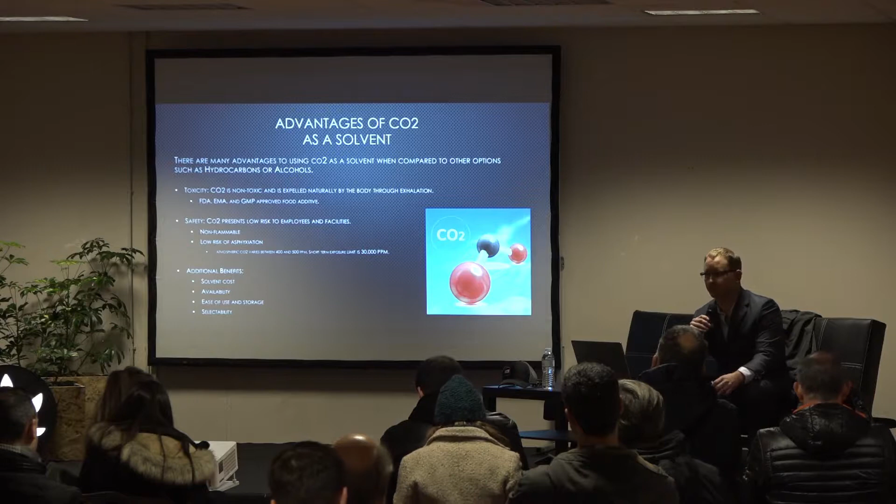Ease of storage. You don't have to deal with issues related to fire departments or municipality concerns, because it's a high pressure storage system that has very little chance for leakage. You have 50, 100, 200 pound tanks that don't leak, and you can stack many of them next to each other. They don't degrade over time, they can sit there. With our machines, we can recover anywhere from 80 to 95% of the CO2 used in the process. It depends on your application and what you're using the machine for.

So some differences as it relates to the versatility, which was the last item on that previous page, was its selectability and versatility. So with CO2, it has an advantage because you can have multiple states of matter with it. You can be running supercritical CO2, you can be running high pressure liquid CO2, you can be running a gas if you're trying to dry something.

Liquid CO2, which is also known as subcritical CO2, a lot of people get that mixed up, is beneficial for certain applications where you want to have very low wax carry through. It generally occurs below 31.1 C, so it's a cold process. You're not going to pull through chlorophyll, you're not going to pull through heavy waxes. There's a chance for some to come through, but not much.

And you have to be above about 5.1 bar, so somewhere between about 5.5 bar and really up to 5,000 psi. Provided you're below 30 C, you can be a liquid and be very high density and have a very good extraction from that.

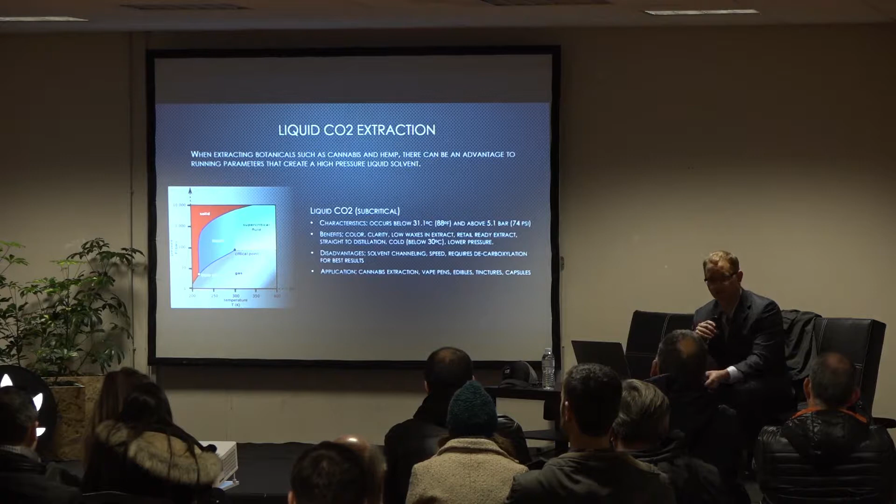The critical point of CO2, which is where it transitions from a liquid or gas to a supercritical fluid, is almost right at 31.1 C. We don't recommend anybody runs close to that, because when you're really close to the critical point, you can change a half a bar and flash from a supercritical fluid to a very low density gas and back and forth, and it causes real problems with the quality of your extract. So we recommend people stay away from that phase change point.

So if you're running a liquid CO2, we recommend staying below 30 C and keeping the pressure somewhere below about 1,300 psi. The benefits of liquid CO2 is the color and clarity that you'll get out of the extract. It'll be very clean and transparent with low waxes in it, provided it was done correctly.

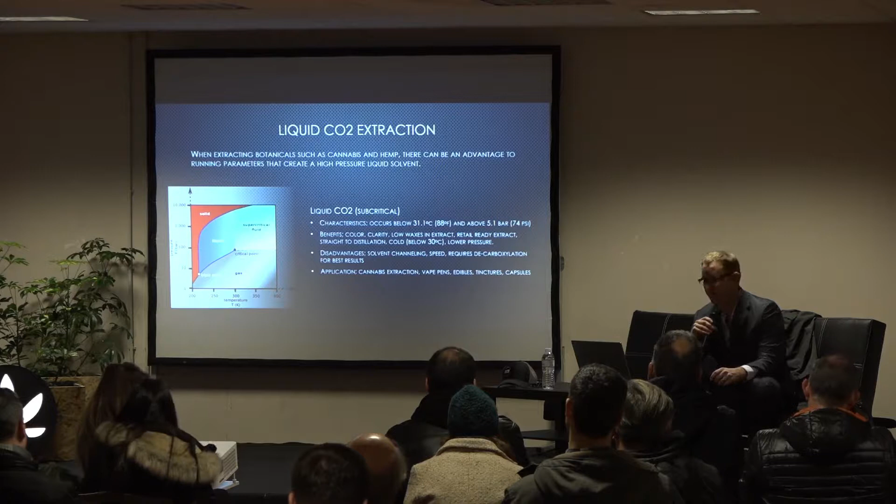You can create retail-ready extract using this method and our machines as well. So that's a benefit to people who are trying to make vaporizer pens or edibles or tinctures or capsules or something, who don't want to have all the extra equipment to go through winterization or distillation. You can make shelf-ready product right out of our machines running subcritical parameters.

Some disadvantages to running liquid CO2 is you can run into solvent channeling, which is where the solvent will take the path of least resistance. So your efficiency can tend to decline when you're running liquid CO2 because it'll move around denser pockets of material. To get around this, some of our clients will actually do a half extraction, pull the material out, mix it up, put it back in, and do a second extraction just to make sure they get the most efficient extraction possible while running subcritical. That's only a couple of people, but it is a possibility.

Another disadvantage is the speed. Although you have very high density, your volatility is really low because of your low temperature. So the speed is a little bit slower with subcritical, but you can make shelf-ready product right out of the machine, so it's a trade-off of what you're trying to produce and speed.

It does generally require decarboxylation of the plant material, and that is essentially heating the material to an adequate point for an adequate amount of time. We usually recommend about, forgive me, Fahrenheit, 250 degrees Fahrenheit for an hour to an hour and a half in an oven. A convection oven is ideal so that you get very good circulation of the air. There are some forced air ovens, convection ovens that are actually produced specifically for this that we can sell along with our machines in the event that you're interested in that.

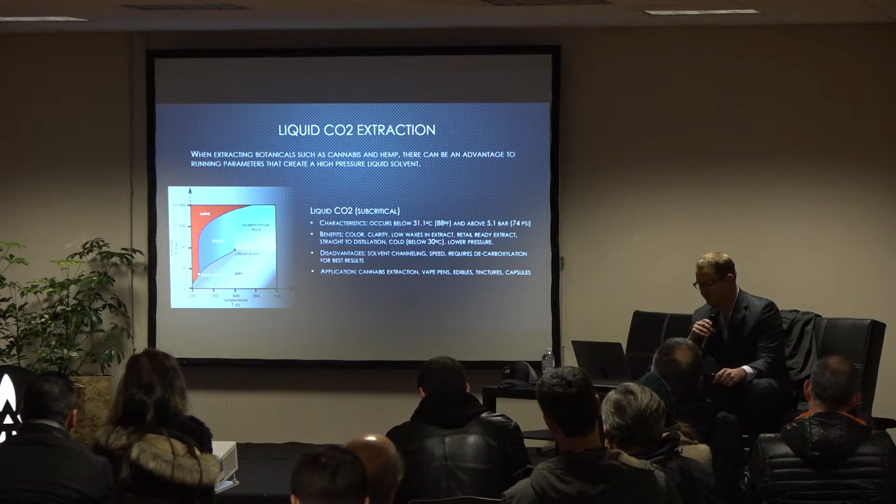Yeah, that's kind of it on liquid CO2. The next one that you'd really be using for extraction, vapor is not really beneficial for extraction, but you can do certain things with it.

The other phase that is ideal for CO2 is supercritical fluid extraction and supercritical CO2. Due to your higher process temperatures, in order to be supercritical CO2, you have to be hotter than 31.1 degrees Celsius. We recommend not going below 33 because, again, you get right next to that phase change point and have issues with maintaining parameters, and it gets funky in that area.

So above 33 degrees Celsius and above 75 bar, the actual point is 74 bar, but again, you want to stay a little ways away from that. So as long as you're at about 1100 psi and about 33 degrees Celsius, you will be a supercritical fluid.

However, at that parameter, your density is going to be so low that you're probably not going to have a very good extraction. If you wanted to run it for a day, maybe you would get some good oil out of it, but I don't think anybody wants to do that. So with supercritical extraction, that's kind of the starting point.

From there, you want to be able to target the compounds or groups of compounds by increasing the temperature and increasing the pressure. By increasing the temperature, you increase the volatility of the specific compound you're trying to extract, but at the same time, you're decreasing the density. So in order to maintain the density required to transfer the compounds into the collection chamber and through the solvent, you have to then increase the pressure to match the temperature.

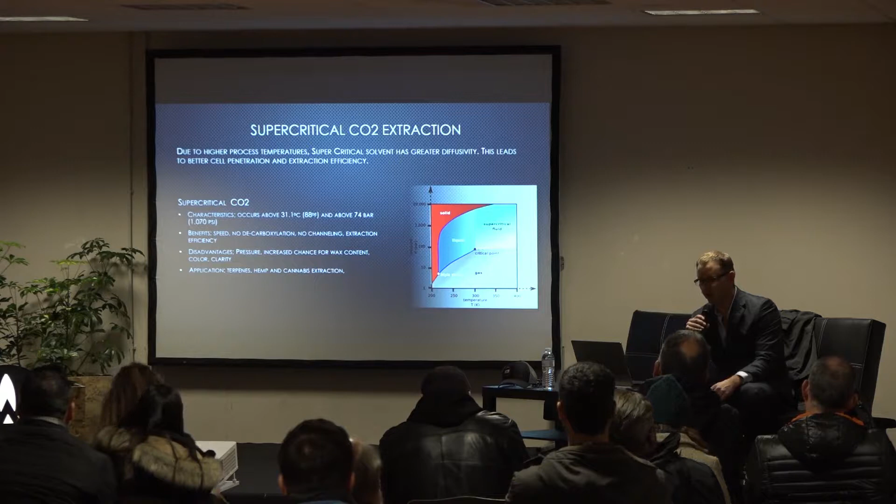Not necessarily no channeling, but very low risk of channeling, because supercritical fluid takes on properties of both a gas and a liquid. It expands to the entire extraction chamber, yet has the density of a liquid, and it also has very low surface tension, so it's able to transfer through cells and extract the compounds much easier.

Disadvantages to supercritical CO2 is the higher pressure that you have to go to, which makes the equipment a little bit more expensive. You have a slightly increased chance for wax content depending on the parameters that you're running. If you're running really hot and at a high pressure, you're probably going to be pulling waxes through, which will require post-processing such as winterization and distillation.

The other disadvantage is at those higher temperatures and pressures, your color and clarity of the extract will decrease as you increase the chlorophyll as well as wax content within your crude extract.

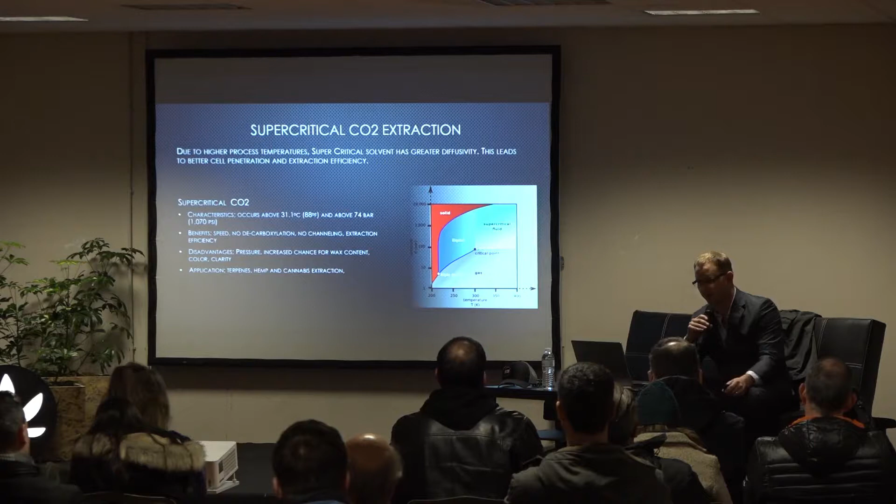Some applications of supercritical CO2 is terpenes. We're able to produce, and our clients are able to produce, very, very clean and product-ready terpenes right out of the machine using supercritical parameters at a high temperature but low density. I'll get into that a little bit later, but that is a very good application for supercritical CO2 and hemp and cannabis extraction.

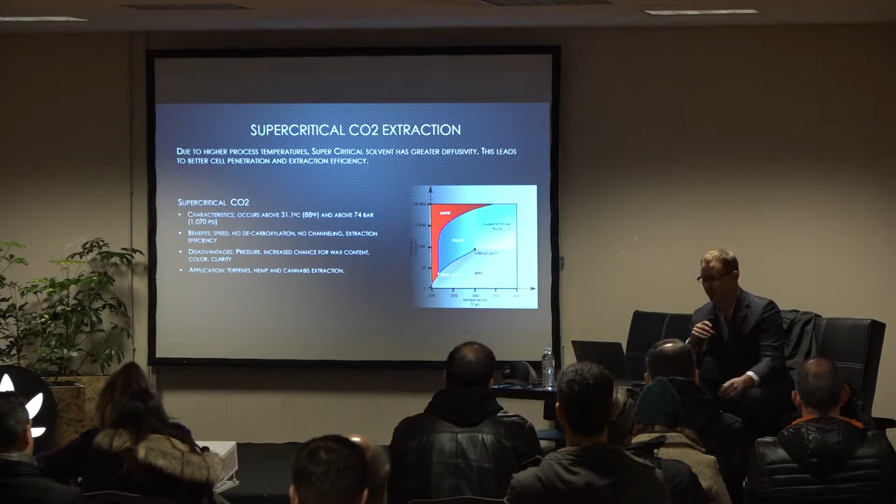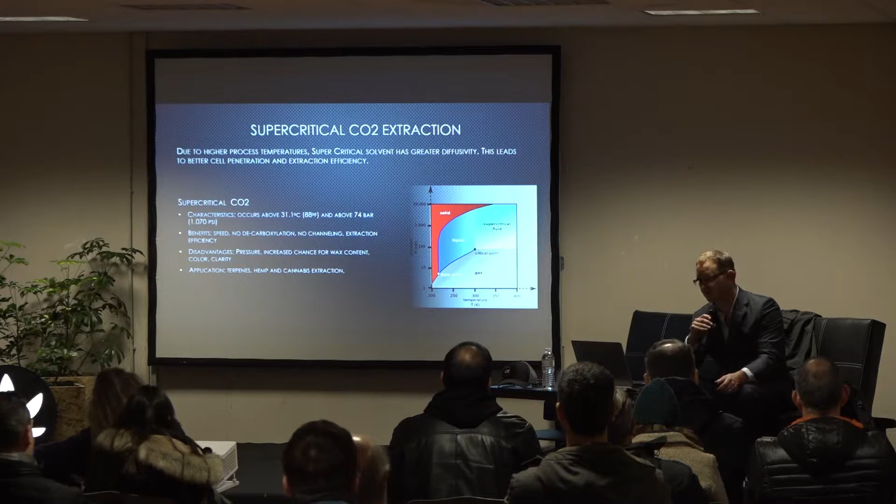Subcritical is not always ideal for hemp because in general it's grown outdoors and you have higher wax content when it's grown outdoors. You also have lower cannabinoid content when compared to cannabis, so it kind of makes more sense to just run a supercritical run when you're processing hemp. But you can really use it for whatever and play with it, do some research, do some development, and fine-tune your products with this type of process.

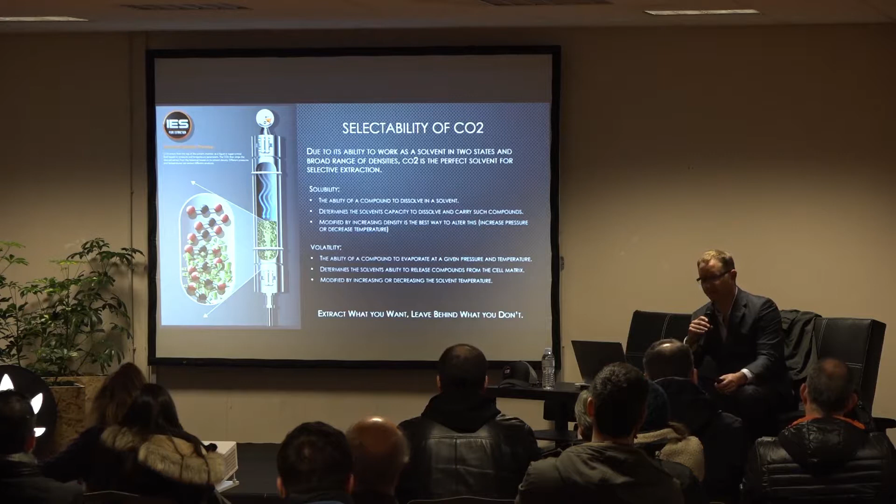So I spoke a little bit about the selectability of CO2 and that you can target groups of compounds. Cannabinoids tend to co-extract, so it's tough to separate CBD from THC during the extraction process because they're so similar to each other that they kind of come hand in hand. You can start to partition it to give a better product that's easier to post-process, but it's very difficult to get a pure cannabinoid product during the extraction process. It's much easier to take the crude extract and push it through some other equipment to get what you're looking for.

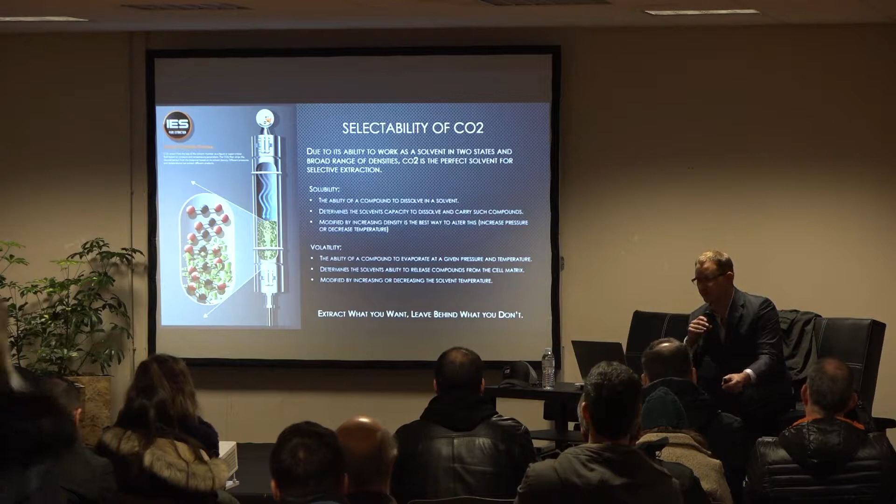Solubility is important. Solubility is basically the ability of a compound to be dissolved in a solvent. And that is obviously important because that is a direct indicator of how quick your extraction is going to be. It determines the solvent's capacity to dissolve and carry the compounds, and that will also determine the runtime you need to do. CO2 has a specific capacity at a given pressure, temperature, and a given compound, and if you have more of those compounds in a plant material, you will need to do a longer run on it to extract all of those compounds from it.

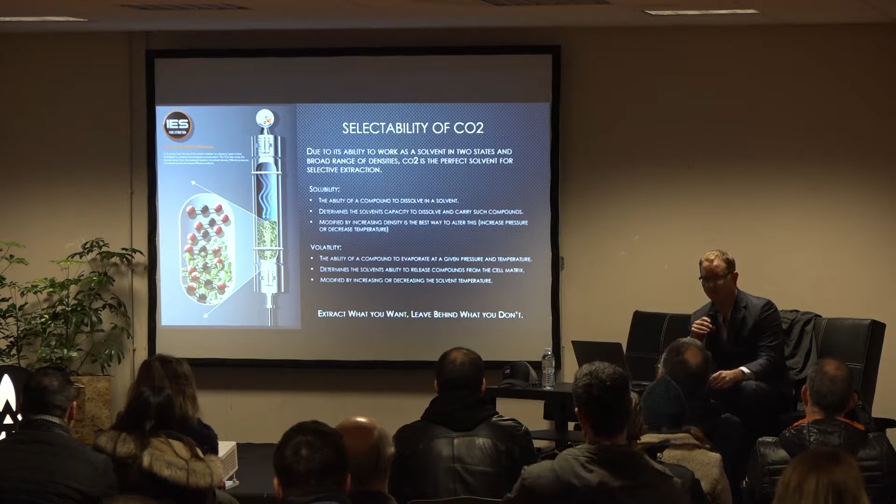The solubility can be modified by increasing the density, and the best way to do that is to increase the pressure and decrease the temperature. But as you decrease the temperature, you're decreasing the volatility and therefore decreasing the ability for the solvent to actually extract it. So the volatility is very important as well.

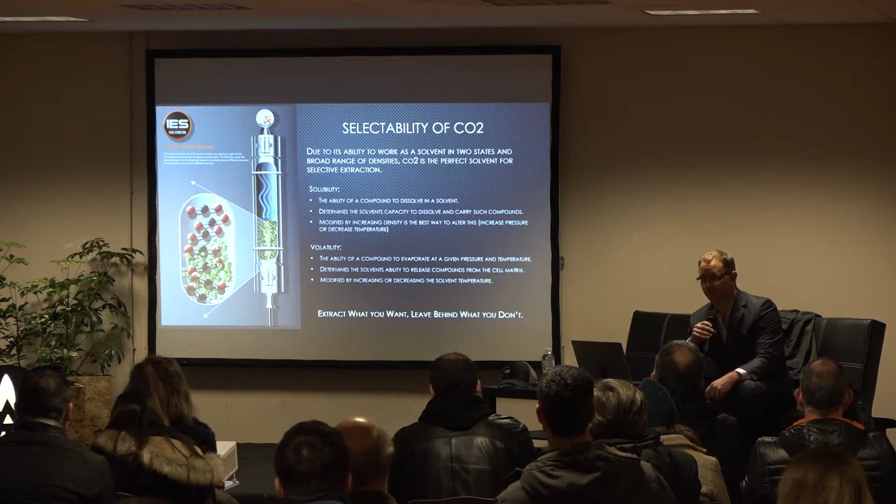And the volatility - when I say volatility, I don't mean it as explosiveness. It's not going to explode because it's volatile. Volatility is basically the best way to describe it - a measure of a compound's ability to evaporate at atmospheric pressures and temperatures. So water is essentially not volatile at all, it will sit there in a cup for quite a long time until it evaporates. CO2 is incredibly volatile because it will never be liquid in a cup. It'll likely flash straight to dry ice before that would ever happen, and from there it will sublimate into gas. It's really good for post-processing because you don't have to take steps to remove the solvent. It does it itself, it just evaporates right out of it.

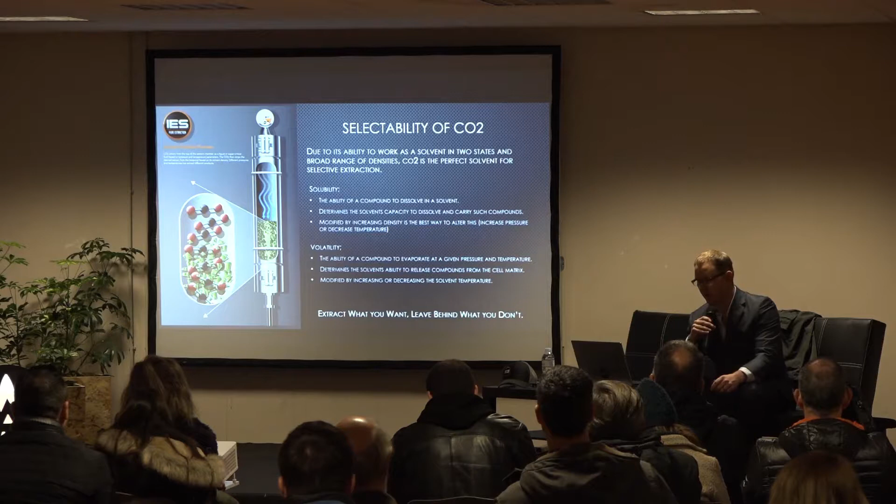Sorry, let me make sure I got everything on this page here. Yeah, and...

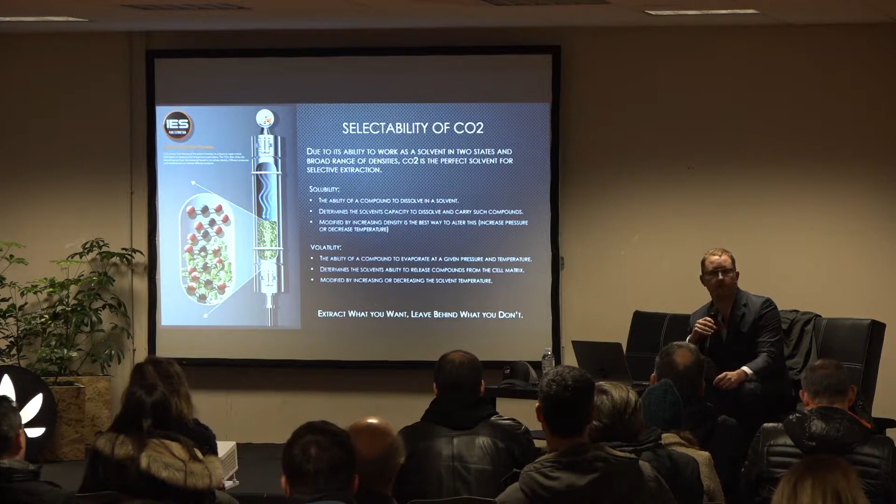The selectivity and selectability of CO2 with solubility and volatility is the basis for our slogan of extract what you want, leave behind what you don't. When run correctly, you can get non-winterized oil that exceeds the quality of winterized oil from butane or ethanol out of CO2. It's not going to be the first time you turn on the machine, but within a few weeks you can become an expert at running these machines and make amazing product without the use of extra equipment.

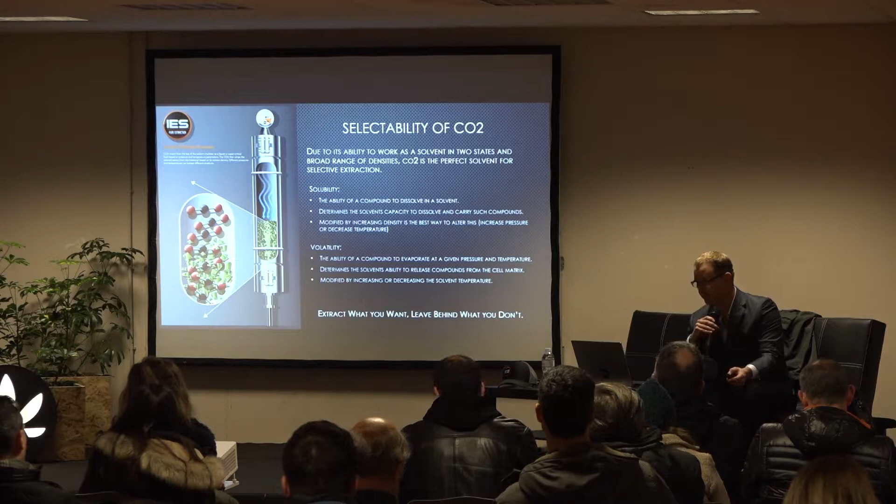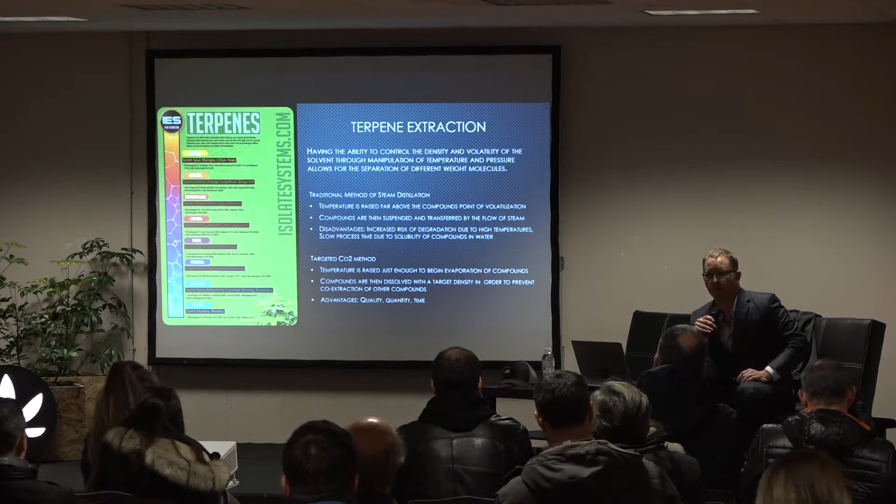So I spoke earlier about terpenes. Terpenes are very important for the entourage effect and whole plant phenomena, and I'm a big advocate for that. I think that isolated CBD is missing many links to help people. I think it's an easy way to get to market because you can sell across international lines and state lines within the United States, but it's missing many of the beneficial compounds that really make cannabis and hemp so medically beneficial.

So the traditional method for terpene extraction, which would be essential oils - it's the essence of it, it's the flavor, it's what you smell when you open a bag or when you smell a fresh plant. Those are the terpenes. The traditional method of steam distillation is you raise the temperature of the compound past the point of volatility, essentially boiling the compound using water, and then the water is actually suspending and transferring the compounds into a condensing column where you can then recapture the water, and terpenes are usually on top, and do a separation that way.

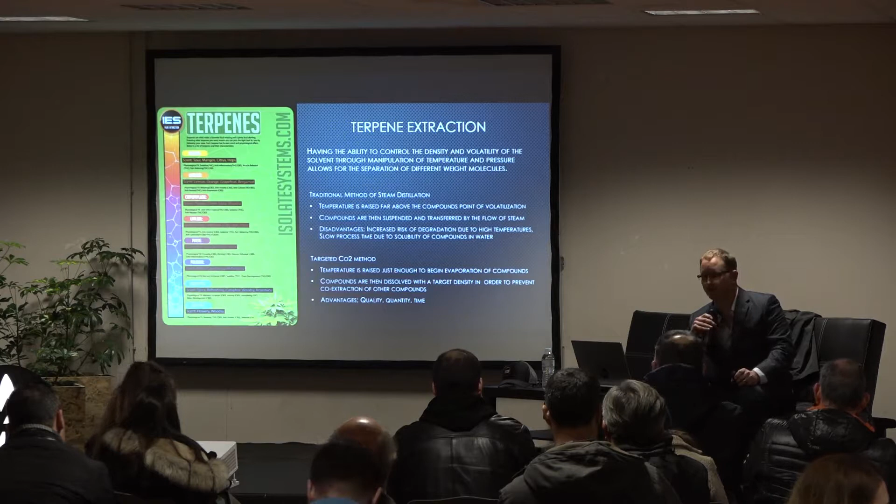The problem with steam distillation is it's inefficient. It leaves your plant material soaking wet, which then has to be dried or processed in some way to get the cannabinoids out. And it's a high temperature when you're talking about volatile, delicate compounds. The benefit to targeted CO2 extraction is the temperature is raised just enough to begin the evaporation of the compounds.

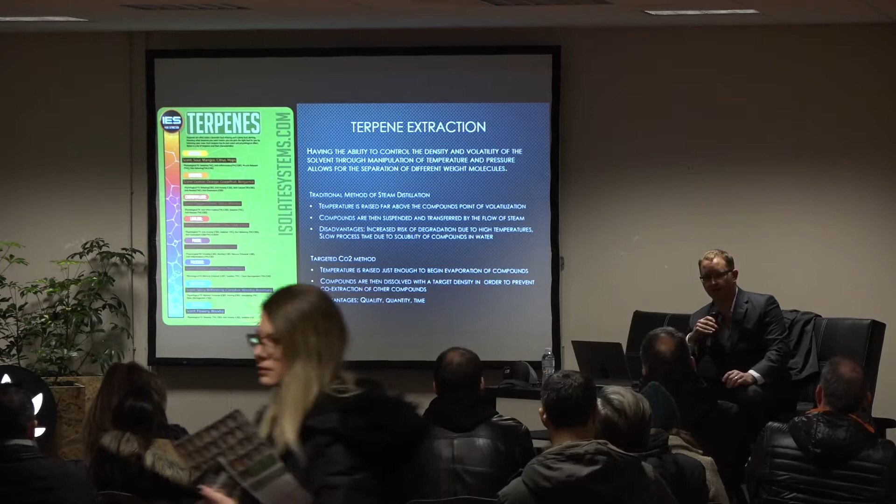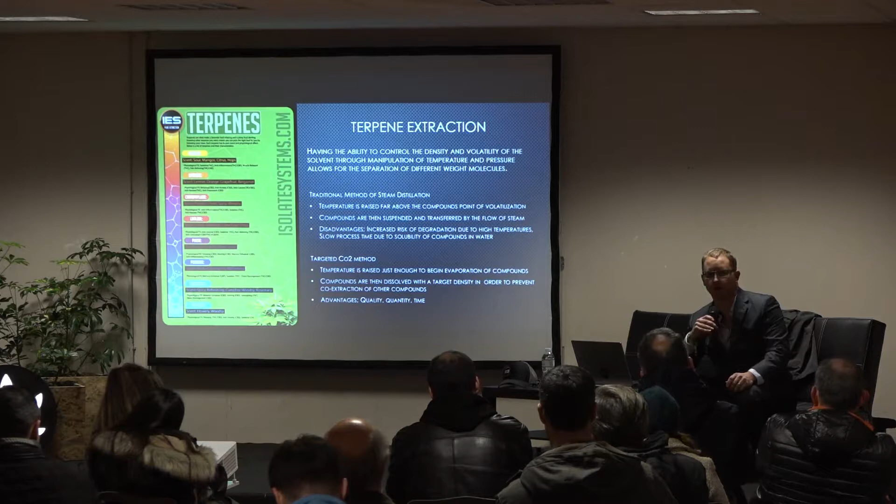And then that, in combination with the low density given a high temperature, low pressure, supercritical scenario, the compounds are dissolved with a targeted density and temperature and carried through to the separation chamber. This retains nearly the original profile of the plant material, and is very clean and very efficient as well.

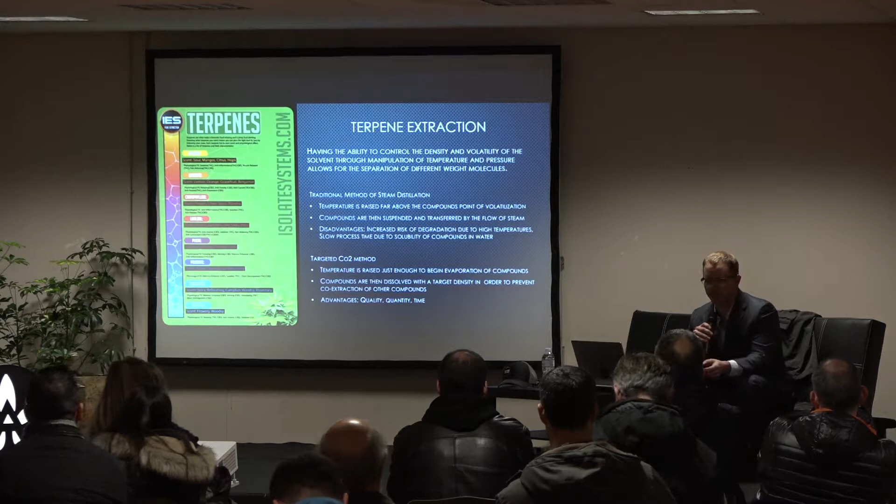Most of our terpene runs are 30 to 45 minutes per batch. All of our machines scale up, so whether you're running a 5-liter or a 200-liter machine, that would be the same parameters and run times. The advantages to it, as I briefly said, are quantity, quality, and time.

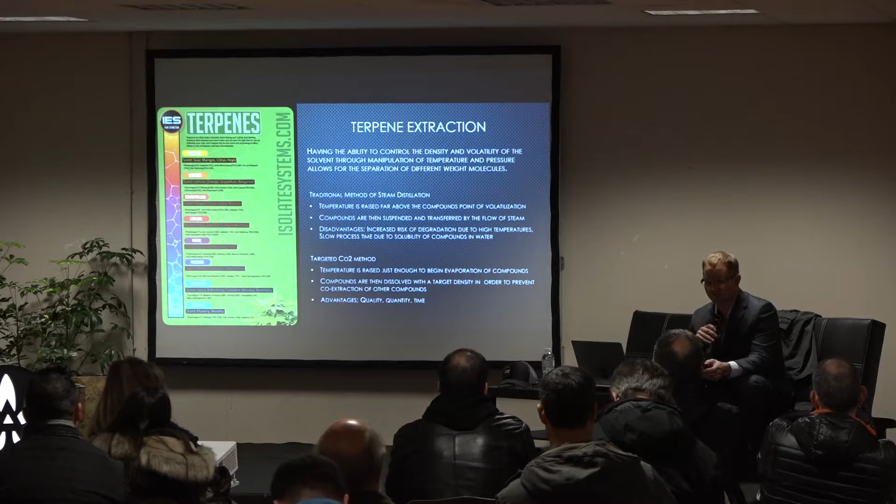Then you get onto the cannabinoid extraction. That's really the next step. I always recommend doing a terpene extraction first, whether you're going to be removing the material after a terpene extraction and decarbing it, or you will be moving straight into a non-decarb supercritical run.

It's very important that you set the parameters for the specific strain and compound you're trying to get. You can co-extract CBD and THC at really any parameter, but there are certain parameters that will pull more of the CBD or more of the THC that you're looking for.

Targeted CO2 extraction of cannabinoids is a balance between solubility, which is density and volatility. As I said before, it's tough to do because increased density allows for the extraction of the heavier compounds. However, the increased volatility increases the speed of the extraction as well. And as you increase the volatility, you decrease the density. So it's a trade-off of where you want to get to.

There is something called crossover pressure and crossover temperature, that at some point, once you hit a certain pressure, you can continue to increase the temperature despite the fact that it's decreasing the density, and continue to increase your yields. That works adversely the other way as well. The advantages to targeted CO2 extraction are quantity, quality, and time.

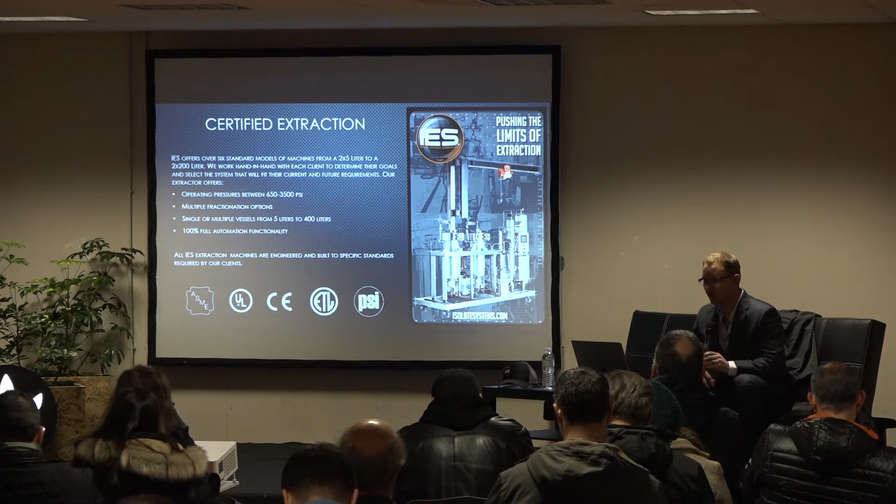So, certified equipment. We currently offer 6 standard models. We used to offer 20 models, and while we still do offer those configurations, they are not standard, and there are longer lead times on them. After 5 years of commercially producing systems, we came to know the most common models produced, so we pulled back our offering to match what customers were interested in.

So we have 6 standard models, from a 2x5 liter to a 2x200 liter machine, and we work hand in hand with our clients to determine what they need and their requirements to extract their harvest.

Additionally, all of our machines are engineered and built to specific standards required by our clients. In the United States, we are ETL and UL listed, as well as certified by a third-party engineering peer review company called PSI. They're kind of the standard in the United States right now. They work with all the local municipalities to provide engineering documentation on the back end as a third party to certify it with fire departments.

It's kind of interesting in the U.S., being from Colorado, which was one of the first states to really push the regulations onto the market, the fire department really didn't know what they were doing. We found ourselves essentially teaching the fire department and the municipalities how to regulate us, meaning our clients in the industry using our equipment.

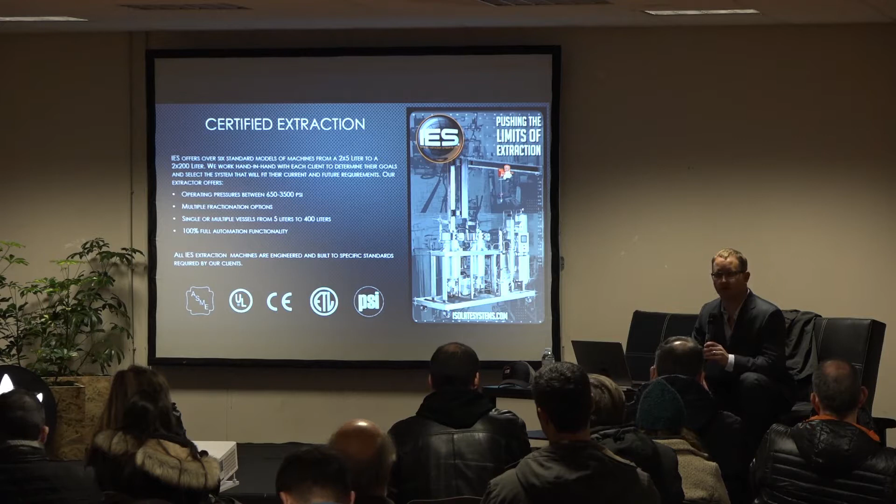It was beneficial in that we could eliminate concerns or misconceptions, but at the same time it was tricky because we didn't want to give them too much information to come back and over-regulate what we were doing.

Team IES. I'm very proud of the team that we have built over the last 6 years. Over the last year, we've almost doubled in growth with employees, and everybody is happy to be there, proud to work for the company and to build the brand and service our clients.

Our service technicians and engineering team are top-notch. The preventative maintenance programs that we provide are really helpful for our clients to ensure there is no downtime. There are no guarantees, but with our preventative maintenance programs and service intervals, the goal is to keep the machine running outside of scheduled maintenance times.

Client relations and support. As I said, we're very committed to the success of our clients. We're not happy if the machines aren't running. We're not going to walk away from anybody, no matter how difficult the conversation is, no matter what is going on with the machine. We are there to support everybody with the process and with our equipment.

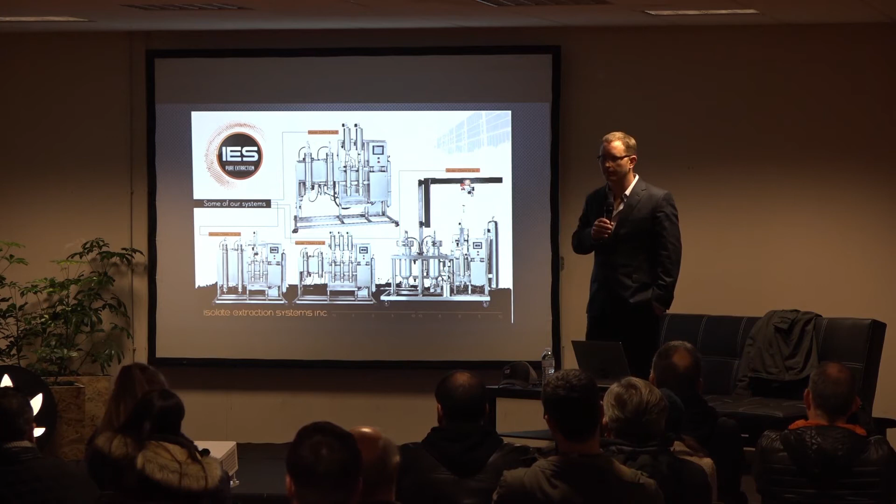Thank you for your presentation. In case of spare part needs, how soon can we have them in Greece? In case of spare part needs, how soon can we have them in our area?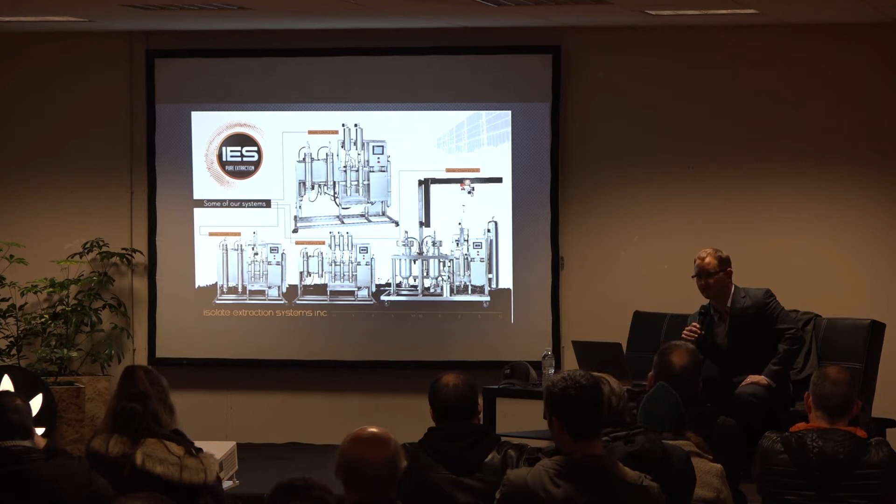With our international clients, we do an inventory stocking program where we keep critical components on site at their facility in the event that it fails. While we're out there, we train them on how to replace those components, and then that faulty device, whatever it may be, usually a valve, will be sent back and we'll replace it with another one that's on the shelf. Along with that, we try to schedule at least one on-site maintenance for our service technicians to come out and really work the machine over and get it back to as-new condition at the end of every year.

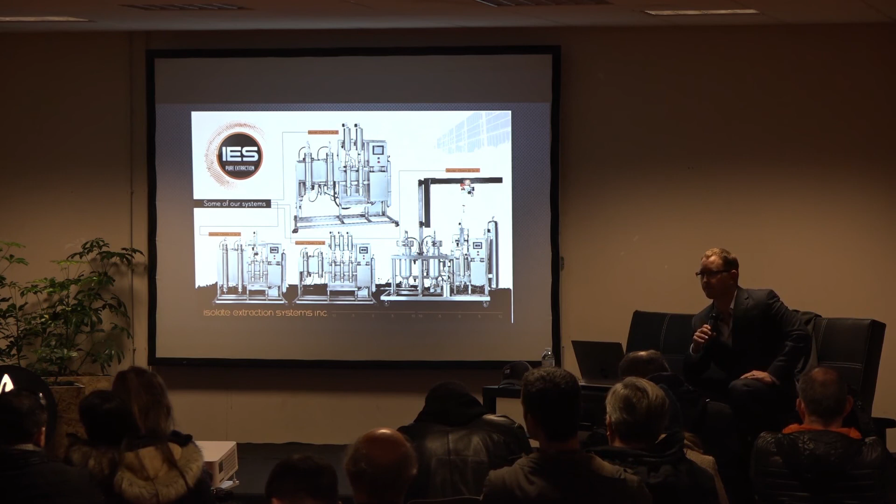Thanks for the presentation. Just one question for a friend in agriculture, because I'm not the expert here. He was asking what would be the best equipment for big-scale CO2 extraction? I would say I.E.S. would be my go-to.

I don't personally have a lot of experience running other large-scale equipment. All of my experience with other equipment is in the 20 liters and smaller scale, so it's hard for me to really answer that accurately.

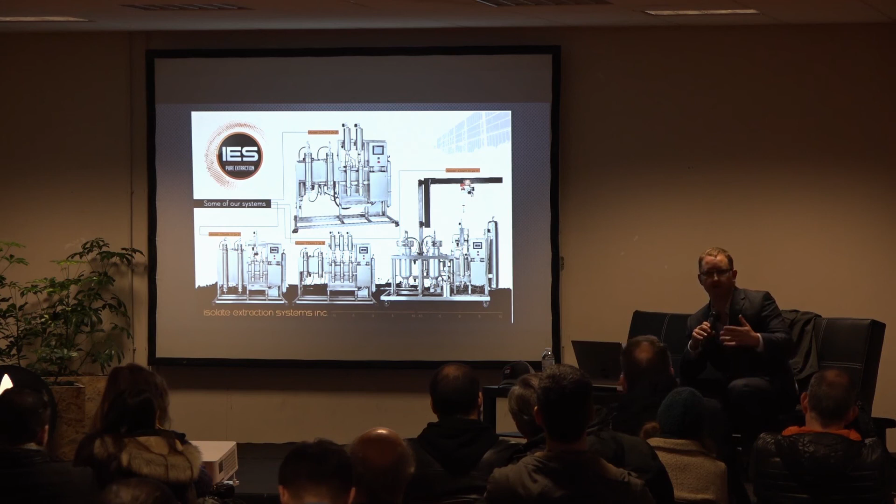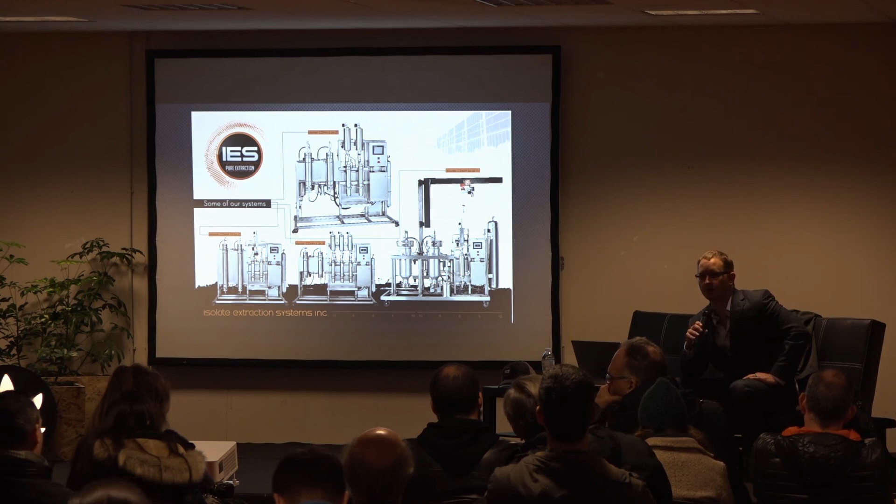So how much a machine can process is probably one of the more complicated questions we get - not difficult to answer, but difficult to get all the information required. What is an estimated cannabinoid content? What is your estimated yield off of that acreage? That all goes into what size system you need. If you're getting roughly 10% cannabinoid content, and forgive me for using pounds, maybe 2,000 pounds per acre, you should be able to process around 100 to 125 acres a year with a 2x200 liter machine.

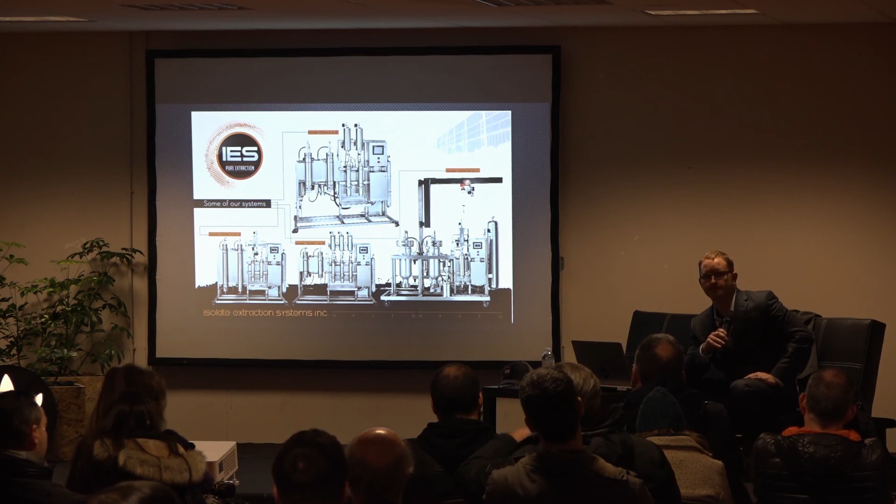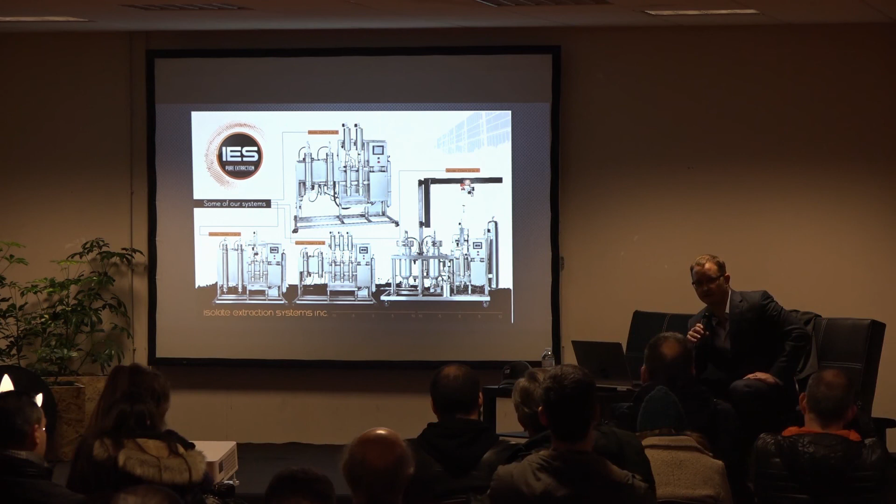Also, your certification program, is that run at specific times of the year, or can someone book in anytime? We do 2 certification classes a month right now. We're going to be probably increasing that to 1 a week, and we're also going to be adding a second level class that goes a little bit deeper into some of the stuff I was talking about.